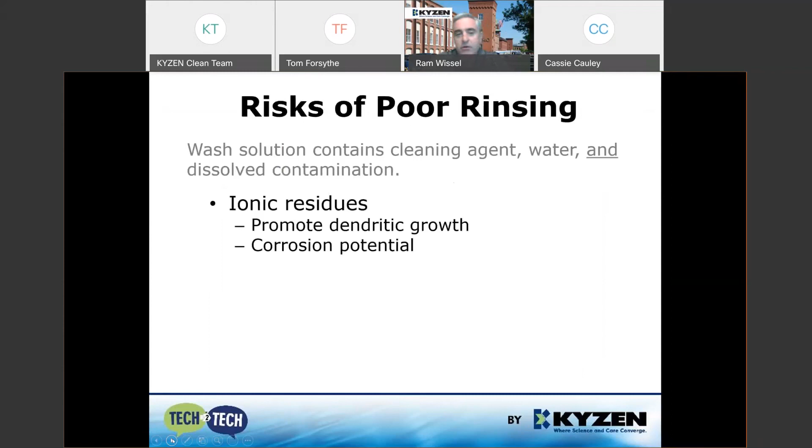Another less talked about material is organic residues. And these are things that can interfere with conformal coating, part marking, adhesion, or subsequent processing steps. The other thing that we sometimes hear about is on complex parts, we may over time have some wash solution weeping out. And it's an indication that the product wasn't fully rinsed during the build.

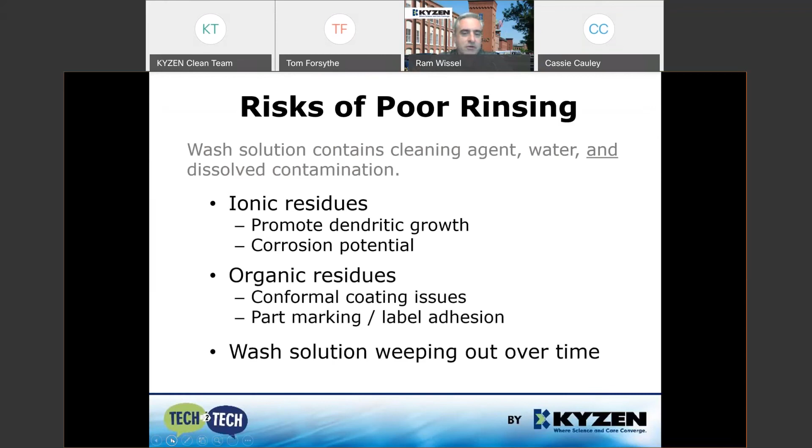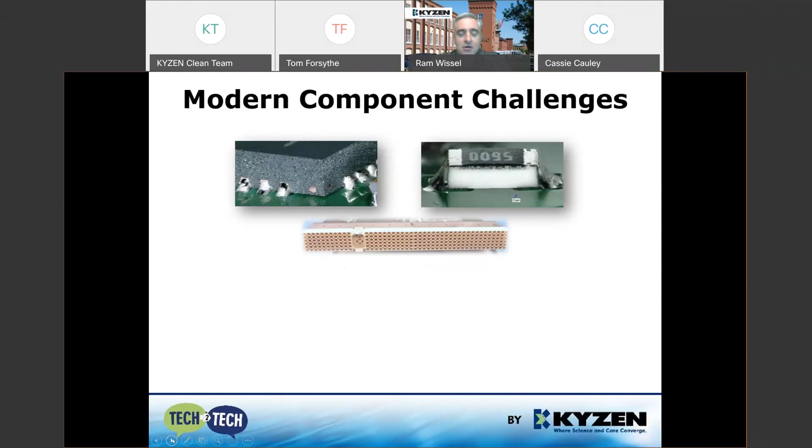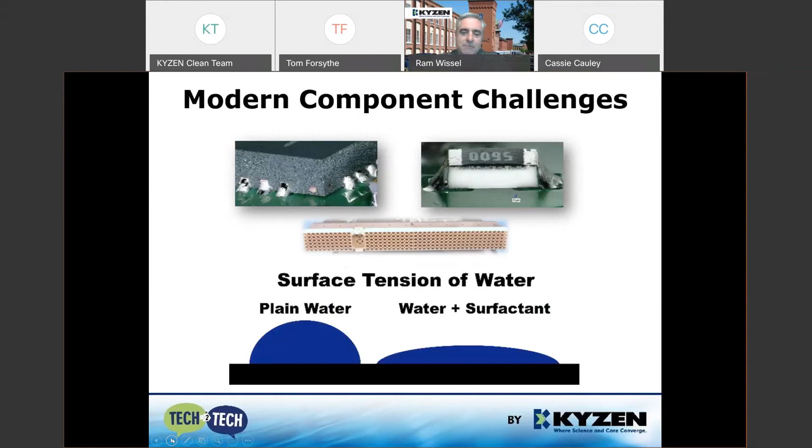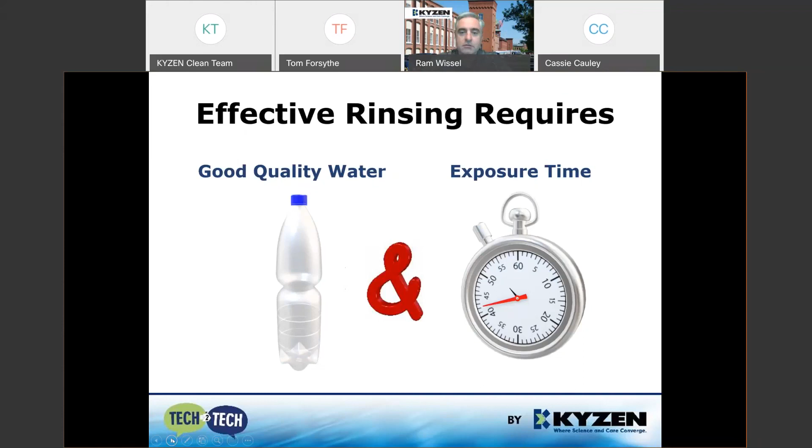So modern components present a lot of interesting challenges. They're very flush mounted to the board in many cases. They may have some complex connectors. And if we think about water, it has a very high surface tension. So the droplet forms a tall bubble, if you will. So to clean these complex components, cleaning agent companies add surfactants that reduce the surface tension to help them penetrate and get under. But then we have to make sure we can get all that material back out. So effective rinsing really requires two things: good quality water and sufficient exposure time.

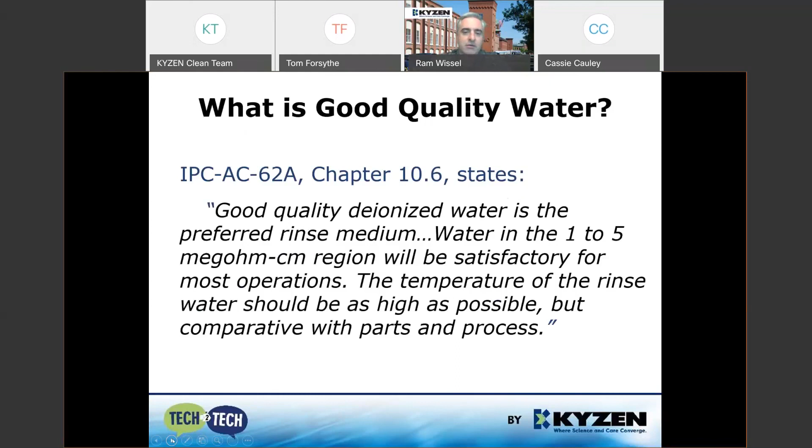So what is good quality water? And in this, the IPC really helps us out, because in chapter 10.6 of IPC-AC-62A, it states, good quality deionized water is the preferred rinse medium. Water in the 1 to 5 megaohm region will be satisfactory for most operations, and the temperature of the rinse water should be as high as possible, but compatible with the parts in the process. That means you don't really want to rinse with boiling hot water. It needs to be compatible and consistent with the parts and process you're using.

So, what is resistivity of water? Well, you make DI water through carbon and ion exchange. Perfect DI water is really 18 megaohms, but it doesn't last very long. And so, on this chart, you can see that, again, sort of the theoretical maximum is 18 megaohms. And the IPC is saying in this 1 to 5 range, you're okay.

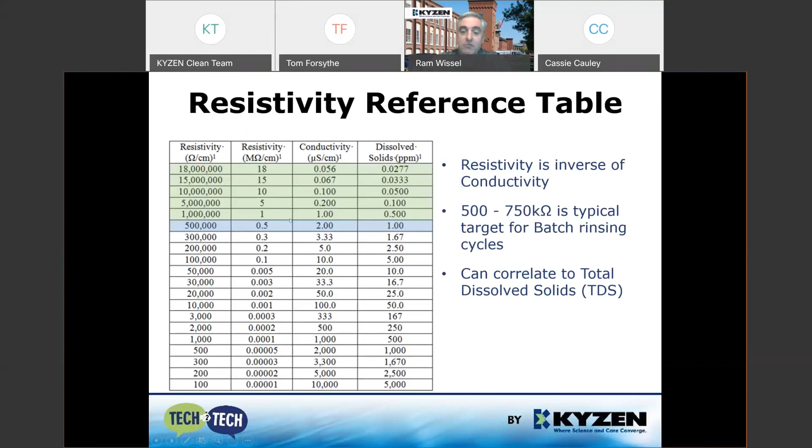Now, resistivity is the inverse of conductivity. So if you have a conductivity meter, you can take that reading and do the reciprocal of it. And it can also be related to total dissolved solids at times. So, if you have really pure, highly resistive water, you're going to have very low dissolved solids. If you get spotting on your parts or you're seeing residues, then that generally indicates that your rinse water is not of a high enough quality.

So then it becomes, how many rinse cycles or how much time is sufficient? And in an inline washer, you normally have a cascading multi-flow, multi-stage process, which starts with the cleanest water in your final rinse, then it goes back to your primary rinse, and then sometimes into your chemical isolation. When you look at an inline, the rinse zones are typically much longer than the wash section alone. And you may have a variety of nozzles and different flow configurations to make sure you're rinsing your complex parts sufficiently.

When we go back and look at a batch style washer, that normally uses the rinse water in a 30-second rinse, and on the discharge of that rinse water, it will have a resistivity meter that measures the water quality leaving, or a cycle count.

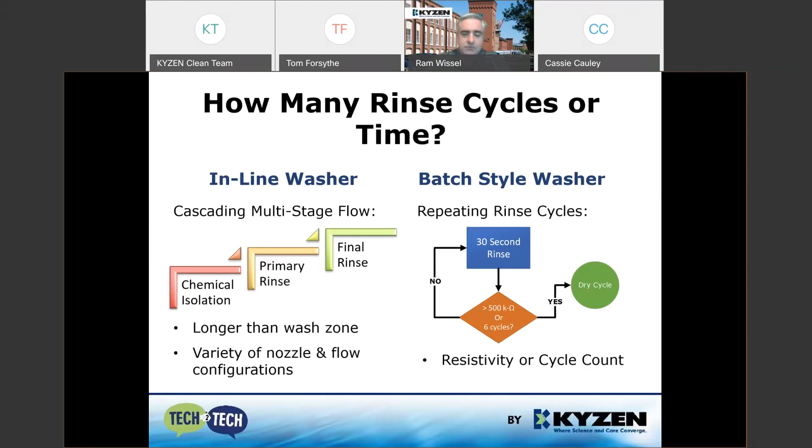And if you're below that 500 K ohm reading, or maybe 750, or less than 6 cycles, it will continue to rerun that cycle again until you pass one of those criteria and go on. So it's a wash, rinse, and repeat sort of process there.

So when we think of rinsing progression, when you have the cleaning agent and you're washing, you have a very low surface tension. But as you go through, whether it be the inline or multiple rinse cycles in your batch washer, that water quality is going to get better and better, and you're going to see that the shape of that water droplet gets taller and it's harder to penetrate.

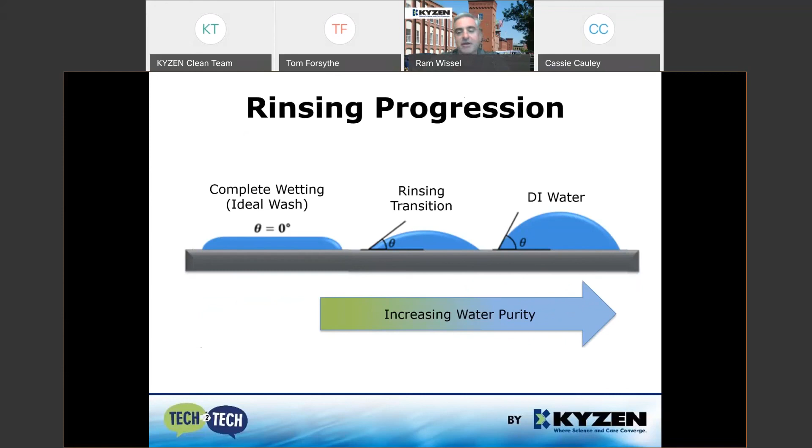So one of the things that we like to look at is contact angle. If you put a bead of water on a bare FR4 surface and measure the contact angle, in this case, it was 79 degrees. We then applied some liquid flux and reflowed it, and you can see a very drastic change in the surface tension or the contact angle of that water. It's down to about 37 degrees.

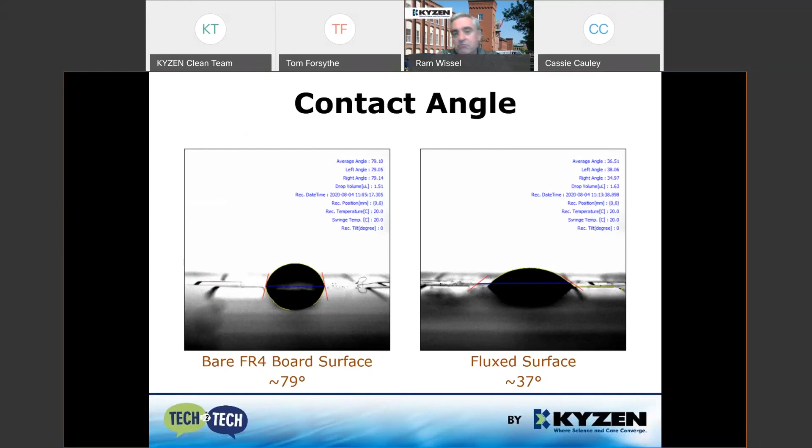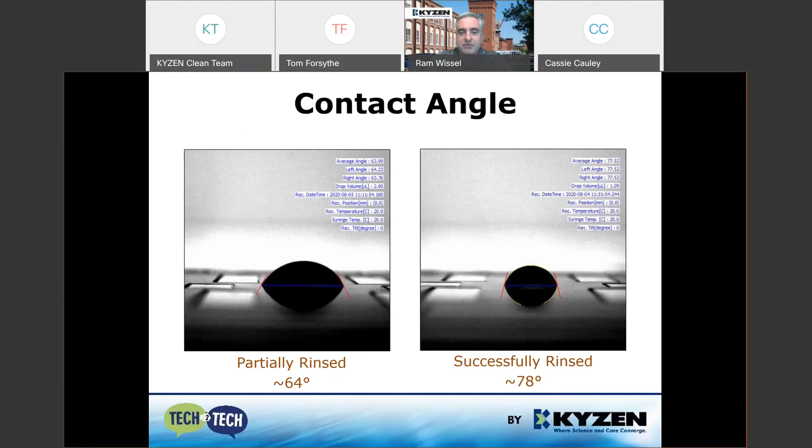So we know what good looks like. We know what contaminated looks like. So what happens when we rinse it? If you do partial rinsing, not complete, it's measured at 64 degrees. We haven't quite gotten back to that 78, 79 that the surface was originally. So that's a way to tell that even though you might not see a contaminant, the surface energy is still preventing water from taking the shape of a pure droplet.

So another thing that's critical with rinsing is, as the wash bath ages and more contamination gets into the wash solution, it can change a bit. So a test we like to run at KYZEN on any customer bath sample is what we call a glass slide test. You take a very clean glass slide, wipe it with IPA, let it dry, and then immerse it into the wash bath solution. Rinse it with DI water for 30 seconds, allow it to dry for an hour, and then come back and put a dyne solution on it.

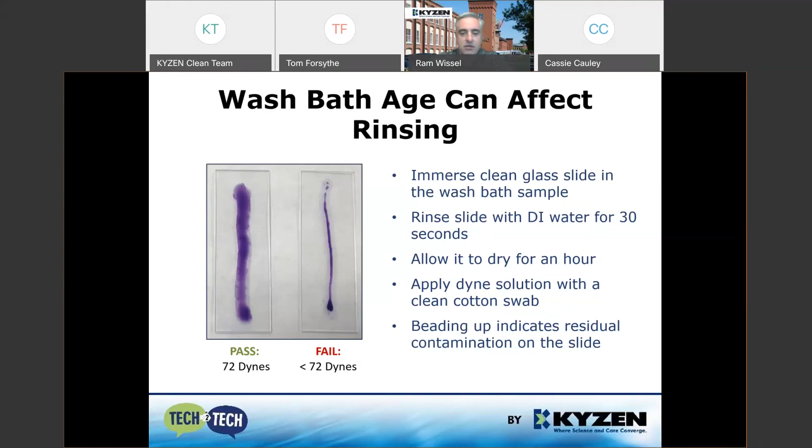The surface energy of water on glass should be about 72 dynes. This broad purple band shows that glass slide is fully rinsed. It's a clean surface. On this side, this is a failing test because that glass has some sort of contamination. You didn't see any visual spots, but the dyne solution behaved very differently. So you can tell that slide is not as clean as the one on the left.

So in summary, maintaining high quality DI water is essential for a reliable cleaning process when you're trying to make reliable quality products. Rinsing is very important, just like my coffee cup in the morning. 18 megaohm water is ideal, but DI water degrades fairly quickly. The IPC recommends a 1 to 5 megaohm minimum. Some people may set that limit to 5, as a trigger point to go and maintain their water bottles.

If you get too much carryover or contamination to your rinse, you may start to see a little bit of foam, and that's going to be an interesting topic in an upcoming tech-to-tech session. Again, incomplete rinsing can be detected by contact angle, a dyne test, or ion chromatography. Ion chromatography is an interesting topic, but we could spend a whole hour on the ins and outs of that alone.